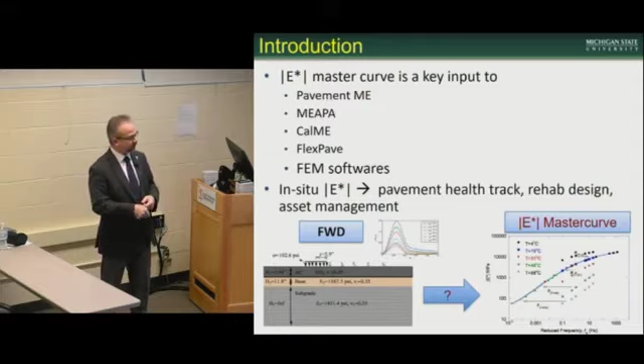So now one of the things is, can we get the in-situ dynamic modulus from the field? That's one of the things that we are interested in. Of course, we can run laboratory tests to get this parameter, but that is the main idea of this particular work. Now, the problem statement was formulated in a way to ask: can the current FWD systems, is there any way that we can use these systems to get the dynamic modulus master curve?

They are not designed to get the dynamic modulus master curve. So originally when they were designed, Dr. Thompson was showing me very early designs of FWD. You have a weight, you drop it, and then measure deflections. I don't think it was designed for the dynamic modulus back then, I assume.

So later on, obviously, it has been improved quite a bit. Now, the chances are, at the time when we were starting this work, it is not sufficient - it's not enough to get the dynamic modulus. So if it is not enough, what is needed to improve the FWD so that we can get the dynamic modulus master curve? Early on, we were entertaining the ideas of, okay, multiple pulses - can we come up with equipment with multiple pulses and get the data properly? And, you know, can we get the dynamic modulus that way?

So this is just early on discussions and all that.

A little bit of a spoiler alert at the very end: if the dynamic modulus, if the FWD data time history is collected properly by the equipment, and if the temperatures are known in the pavement, or at multiple temperatures you run the FWD, you should be able to get the dynamic modulus master curve pretty good with the existing devices. That's the spoiler alert. But I'll tell you how we get to that conclusion.

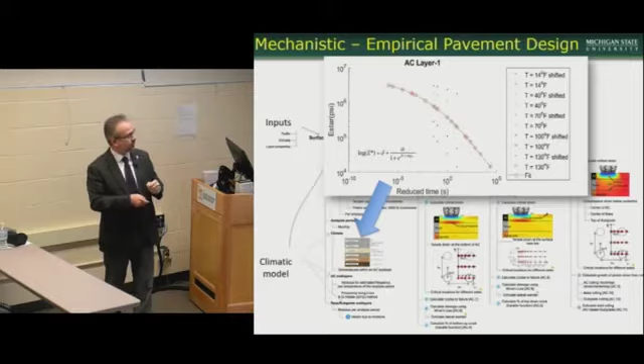So in pavement ME, what I was showing here is just a snapshot of pavement ME, all the different components of pavement ME or MEPDG. Dynamic modulus at different temperatures and different loading speeds are heavily utilized in pavement ME.

And that dynamic modulus, if you look at the NCHRP 1-47 sensitivity study, they have what they call tornado plots. In these tornado plots, they look like a tornado. If you look at the very top, it's sorted so that the highly sensitive parameters are at the top and low sensitive parameters are at the bottom.

The numbers you're seeing here, the first two are the hot mix asphalt alpha parameter, which is essentially this parameter - you probably know this. Dynamic modulus can be represented using a sigmoid function. This alpha parameter and delta parameter are the two most sensitive parameters in MEPDG. So the outputs are very sensitive to these two. It's important to get these two right, even more so than the thickness, as this graph shows.

So we all understand dynamic modulus is important, it's a parameter we want to get. First we need to be convinced of that, obviously, right? Now, how do we get that?

So we develop a bunch of algorithms so that we can simulate the falling weight deflectometer stress and the output strain. One of the things we did is we call them forward algorithms - we developed layered viscoelastic, multi-layered viscoelastic forward algorithms.

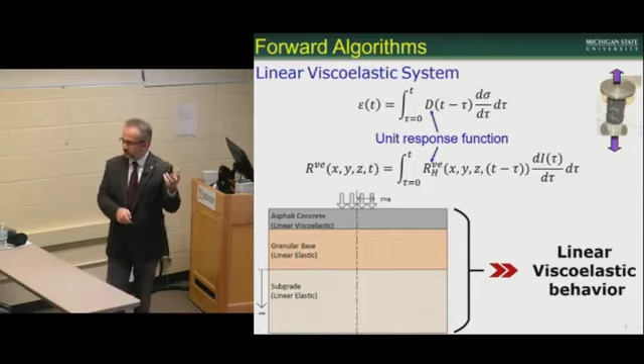What you're seeing here is, if we have the unit response - R is the response, H is for unit, RHVE - this response could be deflections, stresses, strains, anything. If we have the unit response in this system, we can do the convolution to come up with the viscoelastic response. We've shown this is true in FWD through finite element analysis, and you'll see this - it's somewhat similar to a uniaxial system.

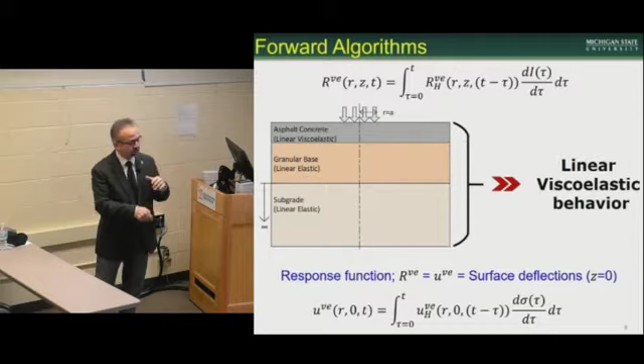Now in this particular problem, FWD deflections are of interest. So the response we're talking about here is U, and U here is the vertical deflections - that's the only one I'll be discussing throughout, not the stresses or strains in this talk. So I'm replacing RVE with UVE, U being the deflections at different locations, and this Z is equal to 0. So we are only interested in surface deflections because we're only looking at the FWD data.

Now, one of the most important key aspects of this overall thing is how to get the unit response deflections, viscoelastic unit deflections. Schapery showed that we can use this convolution to get the viscoelastic deflections or viscoelastic response if we use the unit response due to an elastic analysis evaluated at relaxation modulus at that particular time t.

In other words, instead of running a full-blown viscoelastic unit response, you do a layered elastic analysis using a unit load, but for different times you evaluate the modulus at different times. When you do that, what we call unit response master curves are generated. So for the very first step in this whole analysis, we generate the unit response master curves.

So these are essentially just like D of t. Think of this as a creep compliance master curve, of course with a very different shape. It's like a unit response master curve.

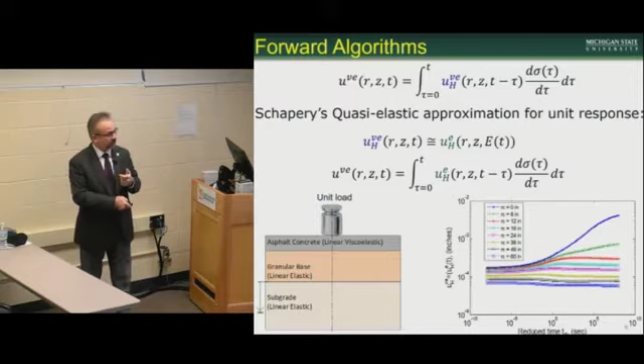This blue line is the deflection right at the middle sensor. The green line is deflection at 8 inches from the center. As you can see, with reduced time, the sensitivity to the reduced time decreases as we get away from the center load, which is very logical. So these are your unit responses, and we plug them in here to come up with the viscoelastic response.

Now, how about the effect of temperature? That's obviously very important, and so far I haven't talked about it. We know that asphalt mixtures obey the time-temperature superposition principle, so we can use the shift factors to account for temperature with depth.

What this is showing is a typical simulation of temperature. This is coming from the MEAPA software, but it's essentially the same model developed by Dr. Barry Dempsey right here in this institution. It's literally his thesis implemented in this code, the EICM code, the same thing. You can see the temperatures vary very widely.

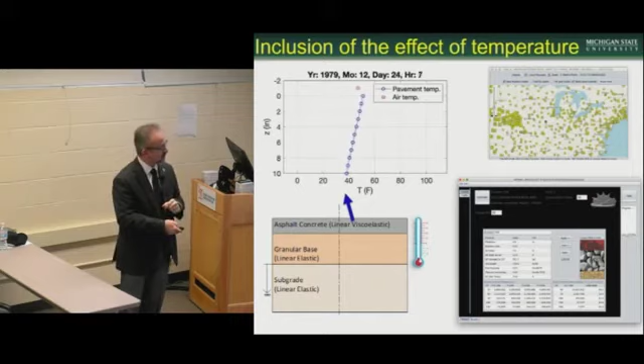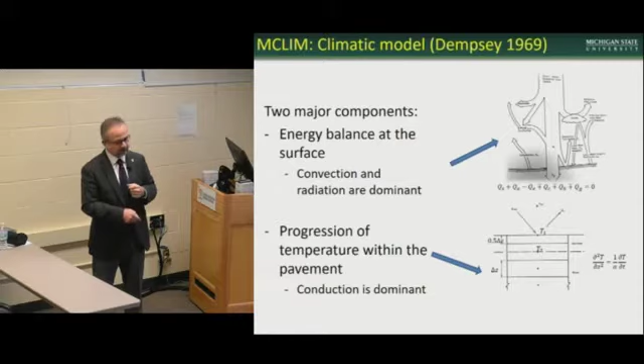So this is a good thing for us. If you are interested in getting the dynamic modulus master curve, fluctuation of temperature is very good because you want to get that information. If you have that information, you can get the shift factor coefficients also, not just the dynamic modulus. This slide shows how we got that temperature versus depth, again based on Barry Dempsey's model from his 1969 thesis.

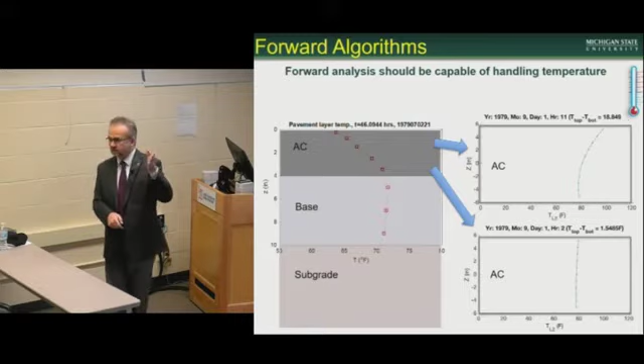Anyway, bottom line is we would like to be able to exploit this information. Sometimes asphalt concrete has a temperature variation, like this daytime temperature kind of thing, and sometimes at certain times of the day it's pretty much constant. So we need to know all this.

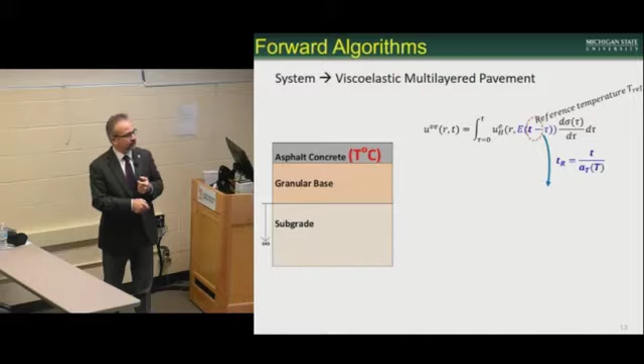Now, if the pavement temperature is constant, things are easier. So instead of time, we use the reduced time, essentially time divided by the shift factor coefficients. Instead of the modulus at a certain time, we use the modulus at reduced time to perform the same convolution.

So to recap, a little more step-by-step description on how we do all this. Certain things I'll be repeating a couple of times on purpose, hopefully to convey what I'm trying to say a little bit better.

Step one is obviously coming up with the structure and what kind of structure that you have. Step two is coming up with a trial or input relaxation modulus master curve. If you know the dynamic modulus master curve, you can calculate mathematically the relaxation modulus master curve, through Prony series or some other methods. So in the forward algorithm, we have the dynamic modulus master curve, and we calculate the relaxation modulus master curve at the reference temperature of 19 degrees Celsius, for example, in this particular case.

Now what we do is for a given time and for a given temperature, we look at the modulus that corresponds to this particular time, and then we plug that modulus into the layered elastic analysis, and we come up with a unit response master curve. This particular point is just this point, and we repeat this for all different times throughout the relaxation modulus master curve. All these little dots result in this one, and once this is done, this is your unit response master curve.

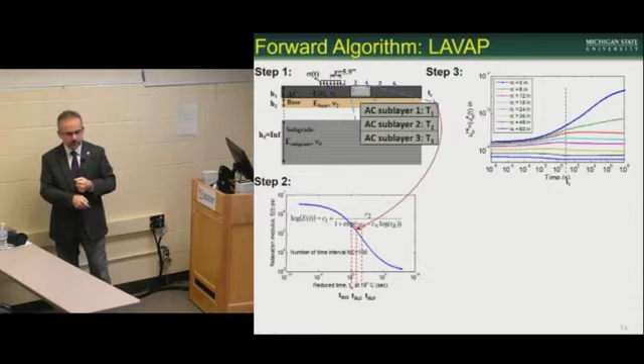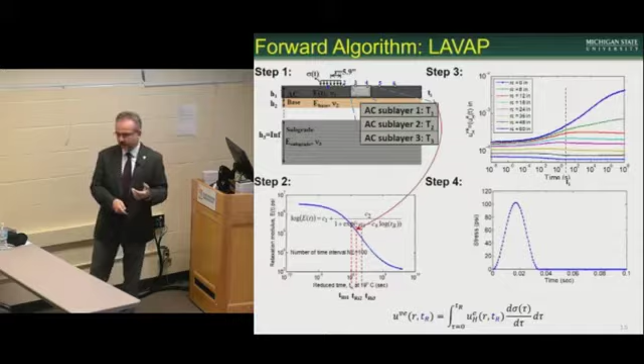When we have a temperature profile, things are almost exactly the same, except for different temperatures. We sublayer this AC layer into multiple sublayers as fine as you want, depending on how accurate you want to be. For each sublayer, you have different temperatures, and you go to the relaxation modulus master curve, find your reduced time, and place the modulus based on the reduced time.

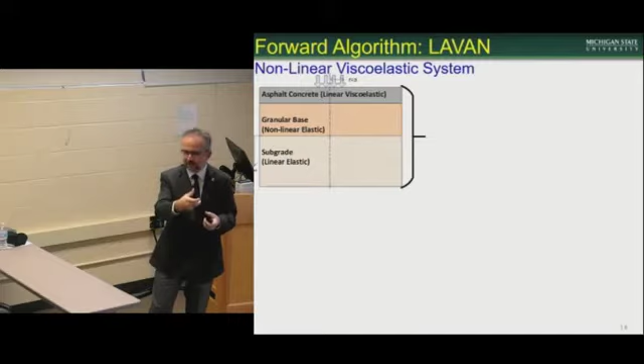So if you have stress changing in the radial direction, and you're going to have stress states changing in the radial direction, that's going to influence the modulus in the radial direction. So the obvious, accurate answer is no. You can't do that.

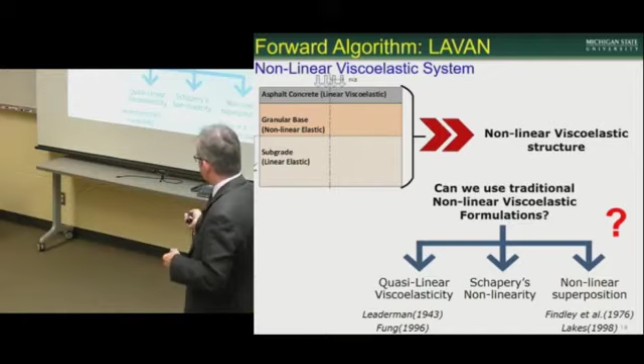So there are traditional nonlinear viscoelastic solutions like quasi-linear viscoelasticity. There's Schapery nonlinearity. These are some of the methods I'll be working on. We tried all of these, and that's what I will be talking about a little bit.

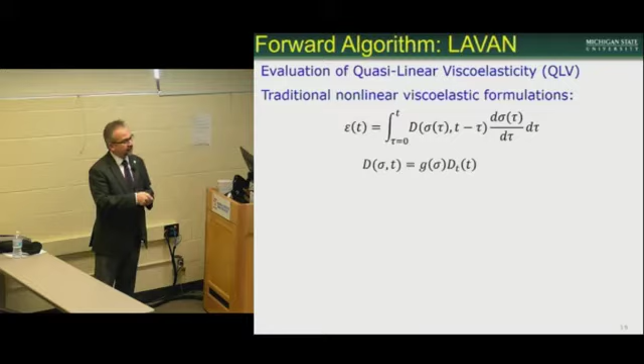Let's talk about the trial of quasi-linear viscoelasticity. Now in the quasi-linear viscoelasticity, you have D of t, now not just a function of time or temperature, but also a function of the stress. This is for a uniaxial case. We started from a uniaxial case, to see if we can move to a multi-layered elastic analysis.

Now, in the quasi-linear viscoelasticity, usually the idea is: can we divide this into two components? One of them is only a function of time, independent of stress, and it represents the shape of the creep function - that's D sub t. The second one is G sigma, which is the component that is only a function of the stress, not dependent on time. So that's what quasi-linear viscoelasticity is. Can we divide this into this? That was our trial, and if we can, then we can separate these two.

And then, if indeed this is independent of time, this can go outside the convolution, so things become a bit easy.

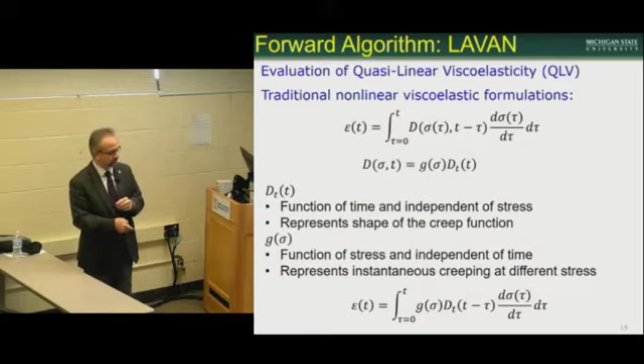Now, when we try to do this, first thing we wanted to look at is whether this is true or not - whether this G sigma is independent of time. So if this is G sigma, I'm rewriting the equation in terms of unit response deflections, instead of d of t, writing u e h t. For this to work, this divided by this should be constant, independent of time. That means for different stress states, all these need to collapse on a single curve.

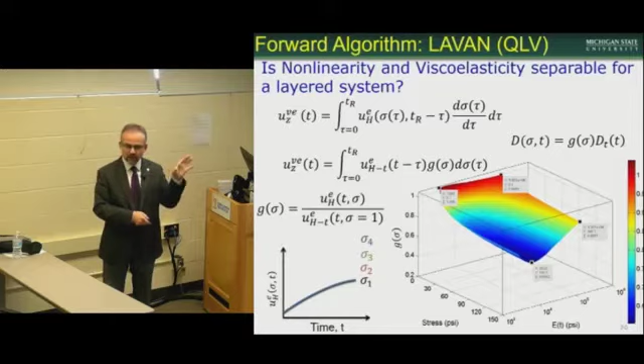When we did this, we did a lot of calculations of viscoelastic deflections and many different unit responses - these are all forward analyses we have done. The answer was no. There is no such thing as G sigma in a multi-layered condition. So this complicates things - this quasi-linear viscoelasticity did not work essentially.

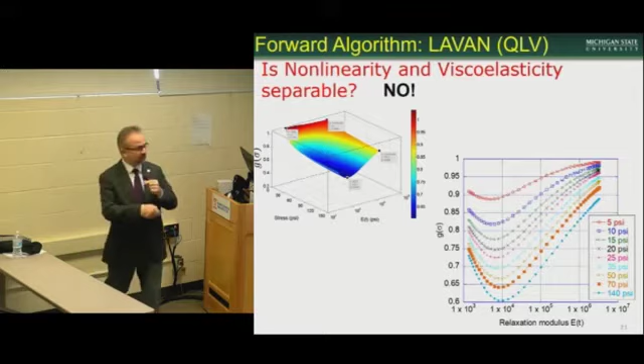This is a slightly different way of showing the same data. Some like surfaces, some like graphs like these. So this is the same kind of data - G sigma as a function of relaxation modulus at different stress states. If G sigma were to be a unique number, it should be a single constant number. Okay, so it didn't work.

Now, then how do we do this? Should we give up or find a different way? So what we did is decide, okay, can we use this entire curve like a lookup table? We generate this matrix of different sigmas and different times or different moduli values - what are these unit response functions. So now the unit response function is not a single line, it's a surface.

Depending on the stress, it changes. So the convolution can still be done by essentially traveling over the surface. Instead of traveling along the line, you are traveling on the surface to calculate the deflection time.

So in order to validate this, things were a little bit more difficult. We had to come up with a UMAT - not me, my student Sudhir. He wrote a UMAT algorithm in Abaqus to implement the nonlinearity of the base in Abaqus, and we compared Abaqus results versus this approach to see if it works or not. And we tried different mixtures.

So asphalt layer is linear viscoelastic. When I say nonlinear viscoelastic, let me make it clear again: asphalt layer is assumed linear viscoelastic, base layer is assumed nonlinear elastic. So the combination is why I'm saying nonlinear viscoelastic.

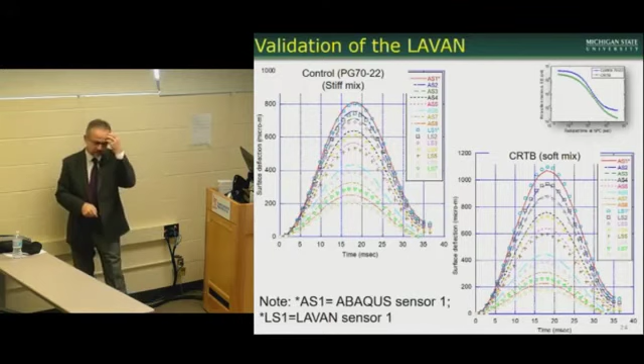Deflections match reasonably well closer to the sensor, and as it goes further, sensors deflections start to deviate from each other. So the bottom line is, if we can use the sensors closer to the load center, we should be able to back calculate nonlinear properties with reasonable accuracy.

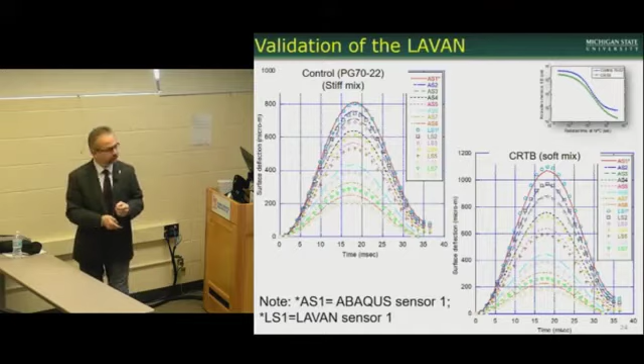Now, back calculation approach - the back calculation is essentially nothing but running the forward analysis, either LaVa or LaVaN or LaVaP, whatever algorithm is used, many times, varying inputs. Obviously, that's what back calculation is all about.

And one thing I want to say is this duration is extremely important. This is a typical FWD duration, 35 milliseconds, very, very short. So let's say going from here to here, this is your time history end. Whatever this duration is, if you take the reduced time and look at the E of t curve, this is the portion you are using in your forward analysis. So up until this point, you're using this to calculate the deflection time histories of the entire thing.

That means that this portion is not utilized during the forward analysis. If you're after calculating this side also, if you're not using the forward, you can't possibly get it. So that means that one of the biggest issues with FWD is the duration of the pulse.

It's very short, so the duration of the pulse needs to be longer, or the temperatures should be a little bit higher, so that we can use as much of the curve as possible. That's one of the key recommendations to the FWD manufacturers - the pulse duration should be a bit longer. Another big piece of advice is really getting the deflection time history very well, which is many times the problem, which I'll get to later.

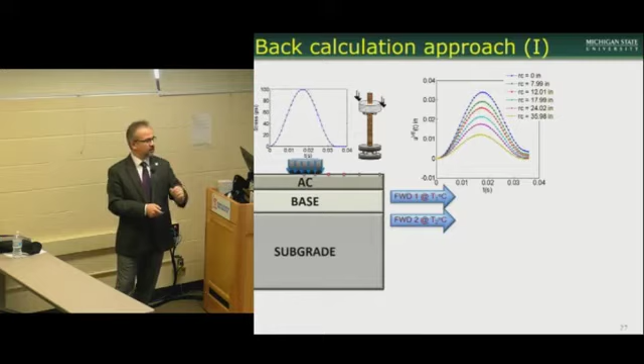Now, when we do the back calculation, we can either run the FWD if you know the temperature to be relatively constant - let's say you are somewhere around 4 a.m. in the morning, where the temperature comes to that level - or you can run at multiple temperatures. If you run the FWD at multiple temperatures and get the deflection time histories at different temperatures, you can get a bunch of E of t curves, and you can shift them, and come up with both shift factor coefficients and the dynamic modulus master curve.

Now, do you understand why the lava was chosen? Okay, back calculation - so, lava.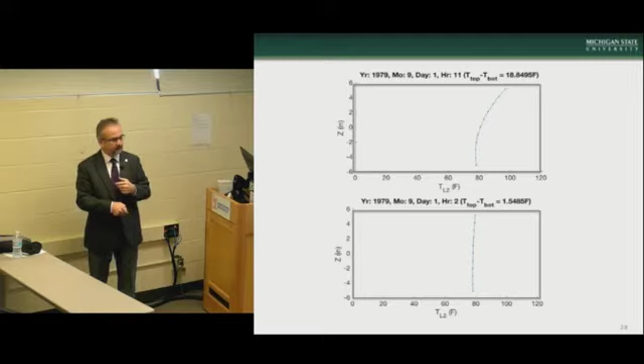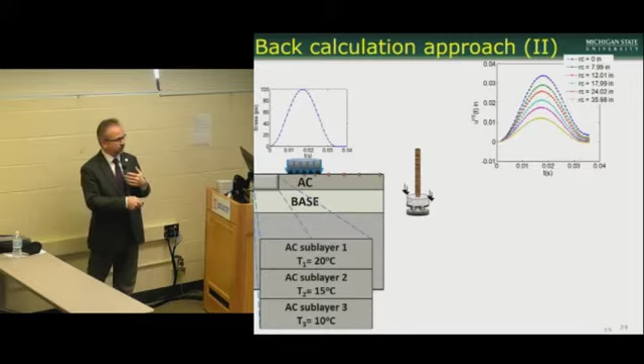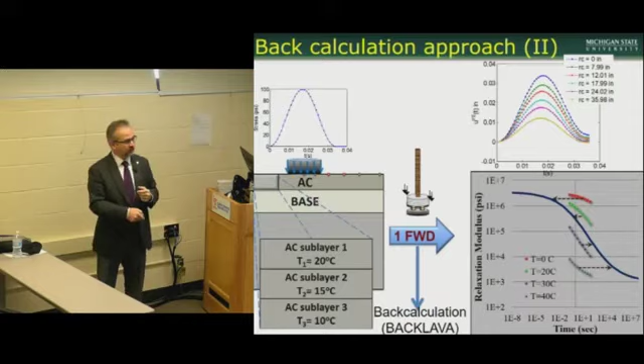So again, these are another example - this is a typical constant temperature profile that could be used. If you have this kind of temperature, things are harder - you need to run the test at multiple temperatures. Now, if you have a good temperature profile, meaning a pretty large difference throughout the depth, that's wonderful. That way you can just run a single FWD if you know the temperature profile, and you should be able to get the master curve reasonably well.

So these are the algorithms that we have - LAVA forward algorithms and back-calculation algorithms. That is the picture of a good back-calculation.

Okay, so now the whole issue is an optimization problem. From now on, I'll switch gears a little bit. Up until now, I've been discussing what is mathematically possible - can we do a forward algorithm? So now what I'd like to come to is the back-calculation algorithm.

That is a very challenging problem. You can have the best forward algorithm, but if your back-calculation algorithm is not working very well, it will go to local minima, which will give you weird results, like subgrade modulus being larger than the base modulus, which we see all the time in many back-calculation algorithms. So you have to be careful.

Now, if you're assuming the base to be a linear elastic material, we will need 6 unknowns for the AC layer - 4 of them are the sigmoid coefficients, and 2 are the shift factor coefficients, since we want to get the dynamic modulus master curve. So we have 6 unknowns, 1 unknown for the base, and 1 unknown for subgrade - so the number of unknowns is 8 for a 3-layer structure. Obviously, if you have a 4-layer or 5-layer structure, or multiple AC layers, things can get exponentially complicated.

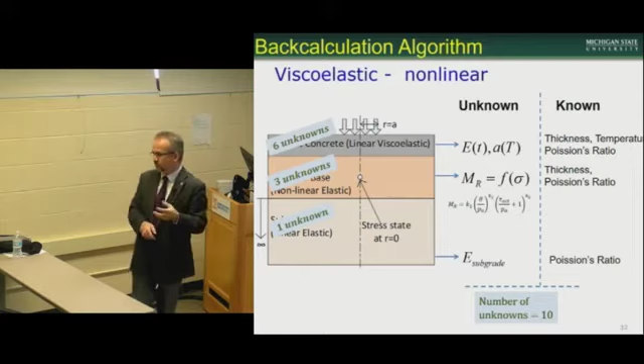So there are many out there. One of them, obviously you're all aware of, is the Excel Solver - you can do Excel Solver. That's a very simple simplex algorithm, one of the simplest ones, but it depends very highly on whatever the input is, and it will go to local minima very quickly. Global minima is usually hard to get. And if you're using MATLAB, fminsearch is another one.

Now what we worked on is something called genetic algorithm. Genetic algorithm is essentially a non-traditional optimization algorithm. I can spend half an hour explaining all this, but I won't do that. Essentially, what genetic algorithm does - it has a fancy name, but it's not that fancy. There's no genes involved.

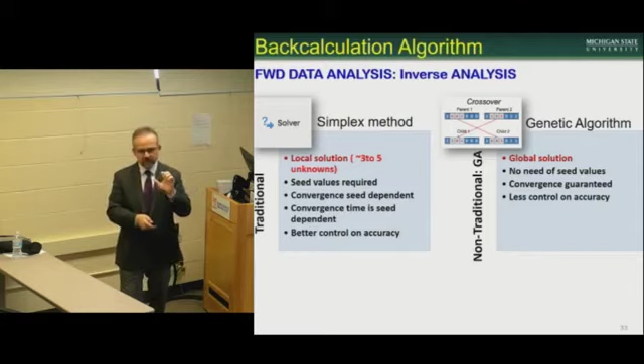It looks like a gene. You have a bunch of inputs. You run the solver, let's say, and then you come to a solution by running it multiple times. So you essentially rerun it again by just changing the inputs. You don't just stop there, you keep changing in a smart way. That's why it's called a genetic algorithm. So you're changing the inputs in a certain way such that the global solution is reached. I'll talk about it a bit more a little bit later.

So the general steps of the back calculation are: you have a temperature profile, and that is assumed to be known. Thickness is assumed to be known. This is a big assumption, so you need a good thickness estimate. We did some sensitivity analysis about what if we don't know the thickness very well, and how much everything is affected if there's an error in thickness. The FHWA report includes all that sensitivity, but this is an important thing that needs to be measured properly. Poisson's ratio, what is the Poisson's ratio? That's also important. There are relationships between modulus and Poisson's ratio that could be used there.

So the unknowns are the sigmoid coefficients, C1, C2, C3, and C4. What are these numbers? I've relabeled them - this is alpha, beta, gamma, and delta parameters that I showed earlier, but we like to use these better than the other ones. So the A of T coefficient, which is the shift factor coefficient, and unbound layer moduli - these are the unknowns.

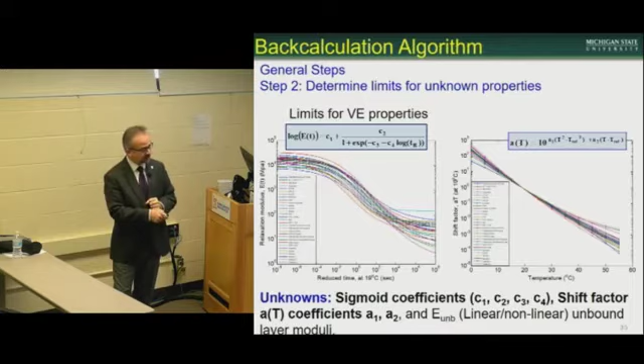Now, in the genetic algorithm, we need to know the limits so that the search has certain bounds. So what we did is we looked at a database of dynamic modulus master curves that we had developed on hundreds of mixes throughout the years. And these dynamic moduli we converted all to E of T curves, relaxation modulus master curves. Then we looked at these C1, C2, C3, and C4, and we tried to come up with different bounds for C1, C2, C3, and C4. We used the same approach here - these are the shift factor coefficients of the dynamic modulus.

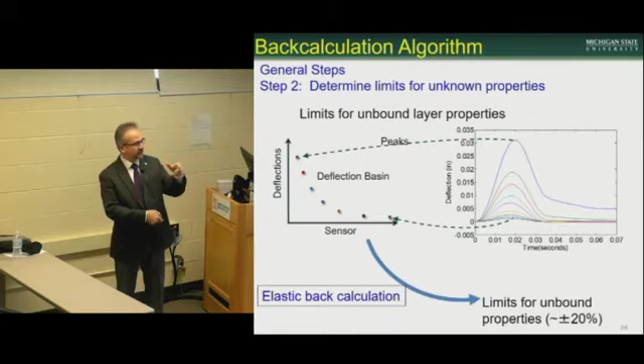Let's move on. For the unbound layer properties, we also need some kind of bound so that our algorithm is fast. So what we did is, for the unbound materials, our idea was let's just use the traditional simple layered elastic back calculation based on deflections. Let's just take that as a seed and go plus minus 20-30% of whatever the elastic value is. So that would be our unbound bound. It's not a wild search, it's just a little bit narrowed search so that the optimization worked a little bit better.

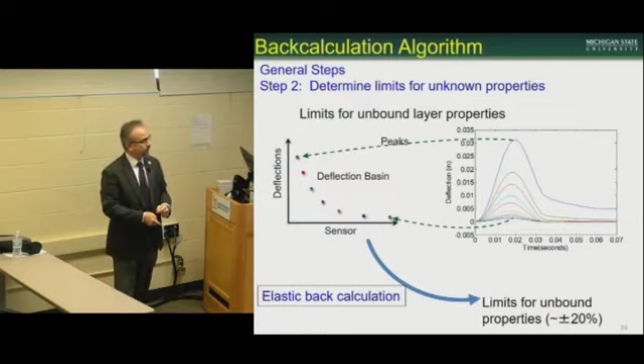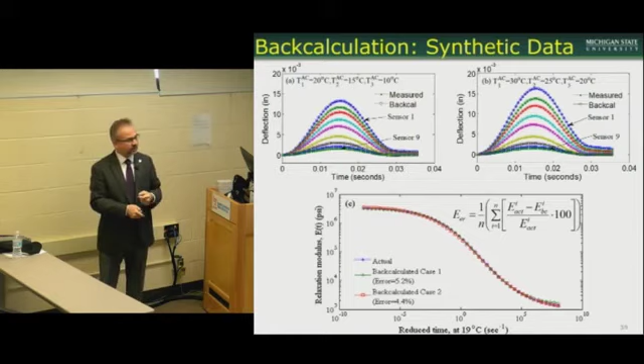Here's another example, a couple of examples using synthetic data. So the first thing we did was - okay, let's see synthetically, if you know exactly what the deflection is going to be by generating FWD synthetic data, let's see if we can get those numbers back. This is a simulation of a multi-layered structure with about 10 degrees Celsius difference from top to bottom. Using synthetic data, we were able to get a perfect match with this genetic algorithm back calculation. This is really just a testing of the algorithm itself - whether if you have perfect FWD data, would it work? So in this case it's really like a self-check, and it was working very well, so the algorithm worked well.

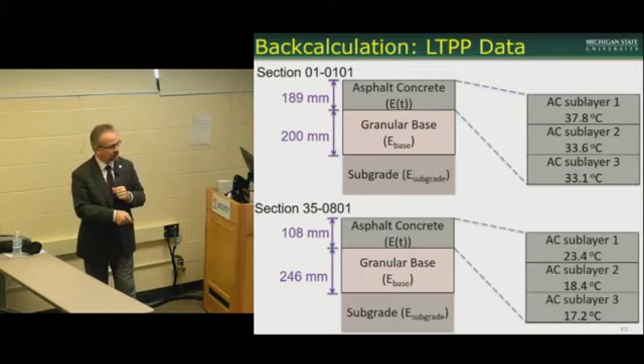So how about real data, obviously, right? For real data, what we did is we looked into LTPP. The good thing about the LTPP database is they have FWD time history, and they also have viscoelastic properties of different sections. So we just needed to find good sections with accurate data. These are some examples I'm going to be providing - this is section 0101, 35, 0801. These are different field sections. From the LTPP database we also had temperature profiles for these sections during when the FWD test was done, so that data was available. When the FWD test was done, this was the temperature profile: top layer was about 38 degrees Celsius, bottom was 33 in this one; and in this other one, top layer was 23, bottom was 17.

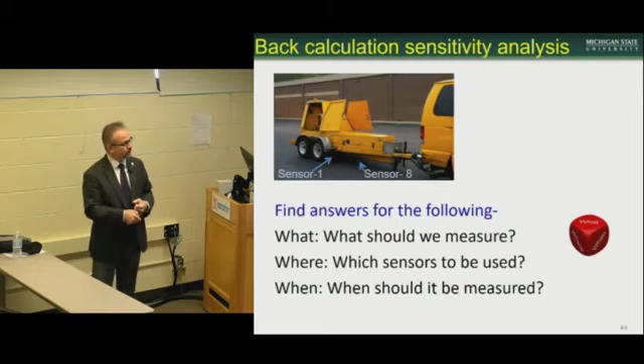So now we also did some sensitivity analyses. One of the questions is, okay, what temperatures to run FWD? What is the best temperature? Which sensors to use? Those are the kinds of things we discussed and looked into.

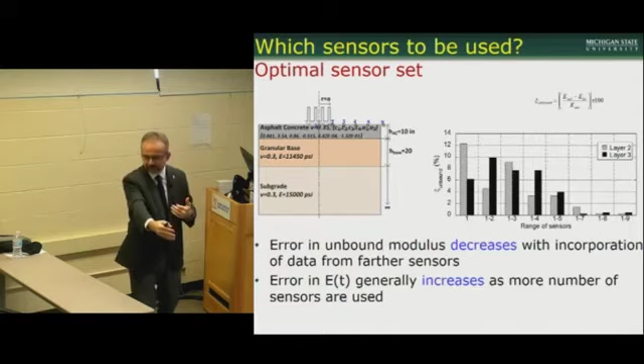What we found is error in unbound modulus decreases when we incorporate more sensors. This is not something surprising. Obviously, if you use further sensors, you can get more information about those lower layers. And error in the dynamic modulus increases as more sensors are used. So it's the opposite. If you are more interested in the dynamic modulus, you need to use closer sensors. If you're more interested in the base and subbase, you need to use all sensors. It all depends on what you want to do.

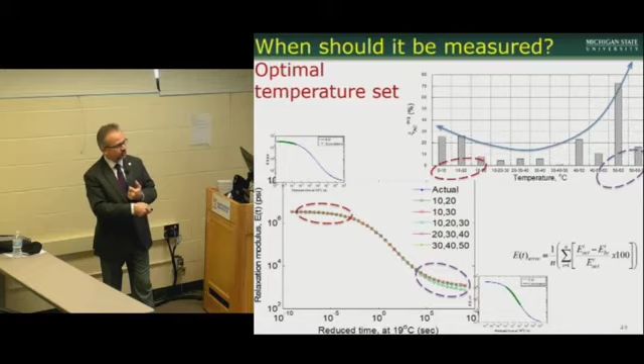So what is the optimal temperature set? We found this through simulations using many different temperatures. If the FWD testing is run anywhere between 10 degrees Celsius up to 50 degrees Celsius, around that region is where you can get the most out of it. At very low and very high temperatures it doesn't work, because at very low temperatures you're only using one side of the curve, and at very high temperatures you're jumping from here to here too much without using the rest properly. So there's a linear jump. That's really the main point.

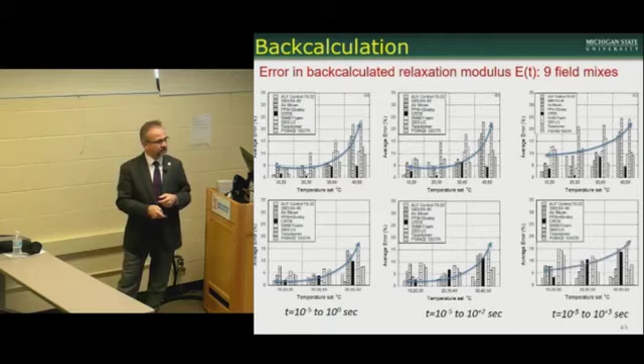We repeated this across many different mixtures and many different dynamic modulus master curves, and they were all consistent. So temperatures around 10 to 20 degrees Celsius are ideal. Essentially, if the FWD test is run in early morning or around noon, that would be the best case.

Now, finally, in order to improve the back calculation algorithm, we came up with a three-stage scheme for calculating all the possible parameters. The first stage is a nonlinear elastic back calculation to come up with the K1, K2, K3 values of the base and subgrade, and the viscoelastic parameters. Then we fix the K1, K2, K3, and vary the viscoelastic dynamic modulus master curve coefficients by fixing the others.

Then, once we find some initial values, instead of using the genetic algorithm, since our seed values are very close to the global solution, we use the simplex algorithm to find the solution by varying all the parameters. This three-stage scheme turned out to be very fast and pretty accurate also.

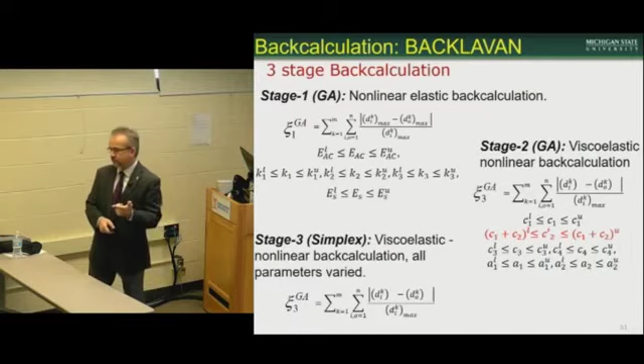So these are some of the results. The percentage error between the dynamic moduli at different temperatures is less than 10% or so, which is pretty good, considering the dynamic modulus test itself has a 30% error when you run the test at high temperatures.

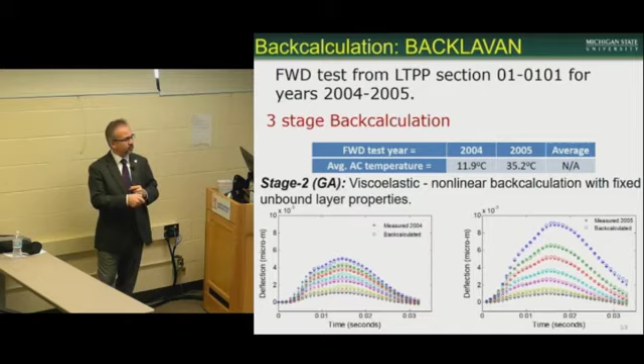These are some other examples using the 3-stage algorithm, some back calculation results. Again, another LTPP nonlinear back calculation results. They have been doing really well.

Finally, one last couple of slides about how do you use this data. Can we use this data on LTPP? What we did is we looked at the evolution of E star with time. Can we correlate the cracking observed in the field versus the evolution of dynamic modulus in the field? So we were able to find some LTPP sections with good cracking data and also FWD data at different years, and we used that data to back calculate.

So we were able to see, initially, obviously the increase is captured, like aging. Aging seemed to be captured at some temperatures, and as the cracking grows, reduction in modulus is somewhat captured. It's not always consistent here. Continuous aging seemed to be, that's what we saw in the data.

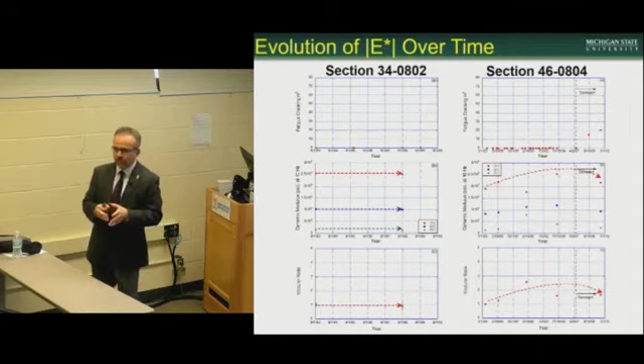Dealing with the field data is sometimes difficult. So what you're seeing here is a section where there was absolutely no cracking that happened, and dynamic modulus didn't change. This is another section where up until here we had the dynamic modulus increasing a little bit and then decreasing after the damage started to appear. So the data is not super clear, but you can kind of see results there.

In conclusion, FWD data can be used to back calculate the proper dynamic modulus master curve. There are two big ifs: if you have the temperature profile properly calculated or measured, and number two, the sensor deflection time history is accurately measured. That second one is one of the biggest issues with the current FWDs that needs to be improved.

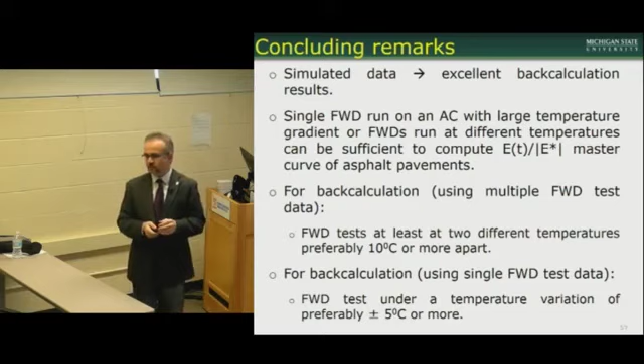Number three, the duration of the pulse needs to be increased. Right now it's a very short pulse, and that pulse is also generating dynamics. When you have bedrock close to the surface, there is wave propagation happening, and because of that wave propagation you have dynamic effects generated. These dynamic effects are not necessarily there when a regular truck passes by. So that dynamic effect needs to be removed somehow from the FWDs. So that's one of the things.

I guess that's all that I'd like to discuss. I already said what the conclusions are. So I think that's all for today. Am I good on time, or 50 minutes? That's about what I planned.

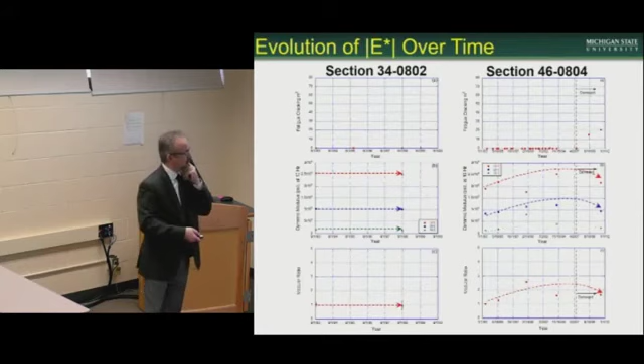Very good, very good. So, see, that aging, first of all, it's there. It's very clear. I mean, when we back calculated dynamic modulus at different times from the data, this increase was pretty clear.

You can see it in several sections, not everywhere. So when you were asking, what if there are multiple sublayers, right? So if the top layer is aging a little more than the others. Exactly. So there is a gradient, not just the aging. So what you will see is, think about one thing, all these...

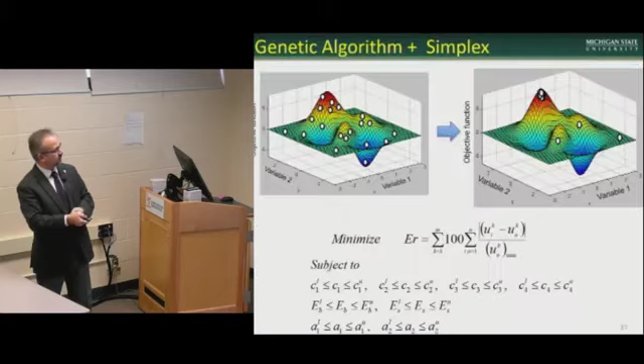Let me go back to this. Let me see. Okay, come on. Hurry up.

Okay, let's talk about this one then. Since the algorithm's sublayer, so the input is how many sublayers you want. Let's say you have a 6-inch layer, you're sublayering into 2-inch or 3-inch layers. When you back calculate, you're going to get 6 dynamic modulus coefficients for the top layer, 6 for the middle layer, 6 for the bottom layer. So you're going to get a lot of layers, and you'll be getting a dynamic modulus master curve for each layer separately. So that's another use.

So if you get really good data, say—assuming again this is a big assumption, assuming you have good FWD data, the test is run properly, deflection time histories are good, and your temperature profile is known—then this shows that you can get dynamic modulus at different layers non-destructively, which is a very powerful thing to do. You can study aging in this way, or air void effects and other things.

What if, within the layer, there is an aging gradient? Then in that case it will be averaged, right? It will be averaged. Yes, from the layer it will be averaged.

So can we further sub-layer the layers, like, everything divided? Yeah, you can sub-layer as many layers as you want. So, the problem is this...

Optimization algorithms—remember 10 unknowns, right? So if you sub-layer into 3, the 10 unknowns become 20-something unknowns. So the genetic algorithm will take a lot more time to back calculate. For research purposes, which is perfectly fine, you can just let it run overnight and come back to the results. You can sub-layer as many as you want, but for practical people, usually that's not acceptable. But theoretically, yeah, you can sub-layer.

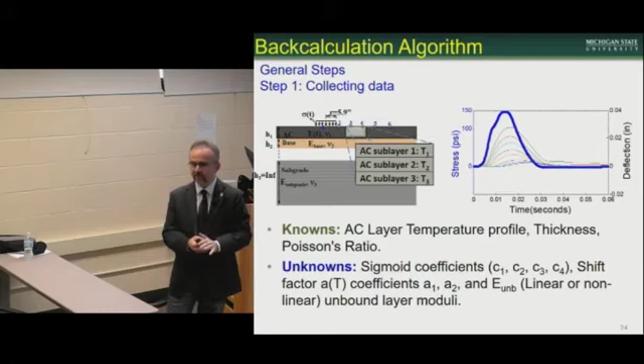I want to give a quick note—I haven't tried it, haven't tried 10 different sub-layers to see if it can back calculate. The algorithms are all available for you to research all that, so you can do it if you want.

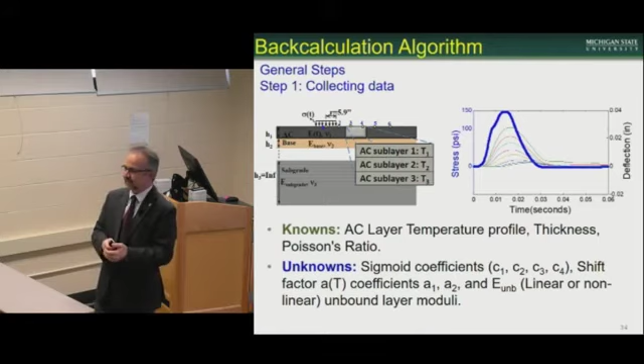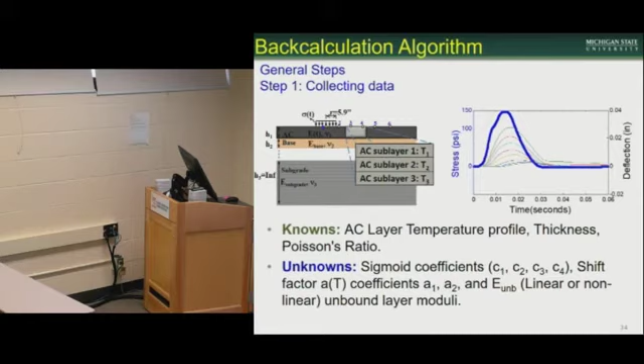Did you consider the relationship between the frequency when you run a dynamic modulus test in the lab and the pulse when you are applying the FWD? Because when you run the complex modulus test, you are applying a frequency, which is a function of the loading. When you apply the FWD, it's just a pulse, which is an impact load. So the frequency you're getting for both are different—is that something you looked at?

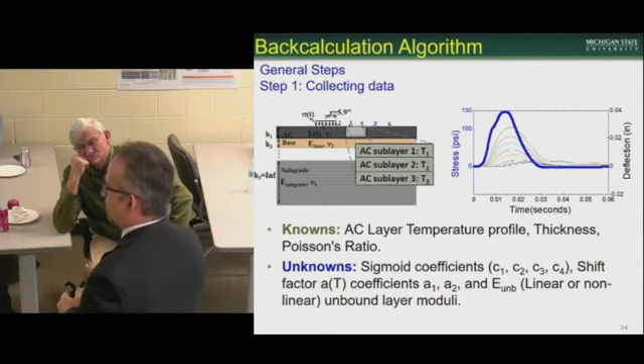It is included, because we don't use dynamic modulus directly—we use the relaxation modulus. So we convert the dynamic modulus to relaxation modulus, moving from frequency space to time space. So the pulse duration—we never use frequency. We use the entire time history and convolution. Therefore we never use frequency, only the time domain.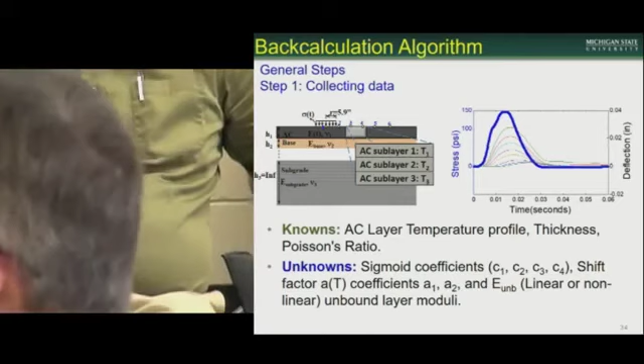I'm getting back to the point because you said that we need to increase the time for the FWD. The more time you include, the more frequencies, in a sense, you're including in the dynamic modulus. Because the time, it's not like 1 over t or 1 over f. None of those apply here. So the more time you have, let's see.

It doesn't apply here, but it does apply to the modulus that you're measuring in the lab. So here, this is the relaxation modulus master curve. Once you have this curve, you can calculate directly, mathematically, dynamic modulus at different frequencies at different temperatures. So all you're trying to do is the larger the portion that you can calculate, the larger the portion of the dynamic modulus frequency space that you can calculate.

The main problem is how do you characterize this into frequency space? What is the frequency? What is the dominant frequency? There's no dominant frequency. If you take the Fourier transform, it comes back to your question—you'll see multiple peaks.

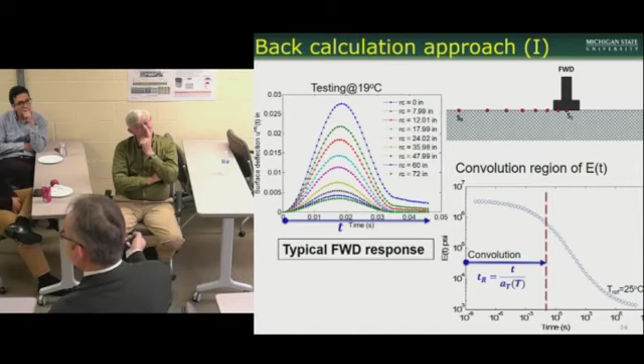Because it's at the surface, the sensor itself is indirectly related to depth, but not directly. So it's not duration—the durations are roughly the same. Even if you do a dynamic solution, the durations are not going to change. It's not like the pulse duration changes significantly with depth. At the surface, usually they don't change.

And this will be a top— that's a discussion. Okay, yeah, he's next. In a, say, a full depth section.

AC over some 12 inches of hot mix on a subgrade. If you use most—all of the deflection accumulates in the subgrade, a lot of it, probably over half of it. If you assume it's non-stress dependent, linear elastic, how does that impact your approach? In that particular case, I don't think it's a wise idea to assume linear elastic for subgrade, because you have a full depth pavement.

You should be using the nonlinearity, which is stress dependent. What I would do in that case is sublayer the subgrade into multiple smaller layers, each with a different modulus, so we can back out the different modulus for each sublayer. So that's how it would work—for most of your examples, you assume a constant subgrade modulus.

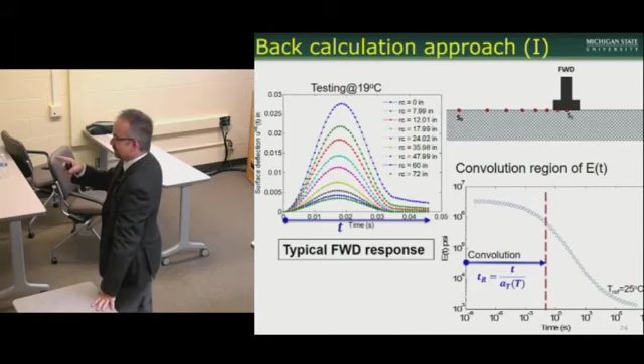Yes, I have a question. Sorry about... I skipped you, but go ahead, he raised his hand last. My question, first, thank you very much.

It's a nice presentation. A question about that sublayering you mentioned. So classical linear elastic calculation usually says when the AC layer is 2 inch or less, it's very difficult to separate them, or it has to be more than 2 inch to see the difference between the sublayers. Do you think here also it would affect the linear elastic algorithm itself? For example, if our sublayer is 1 inch or 1.5, less than 2 inch, do you think in this case, is there any concern, like we should stick within 2 inch, 3 inch sublayers in the AC layer?

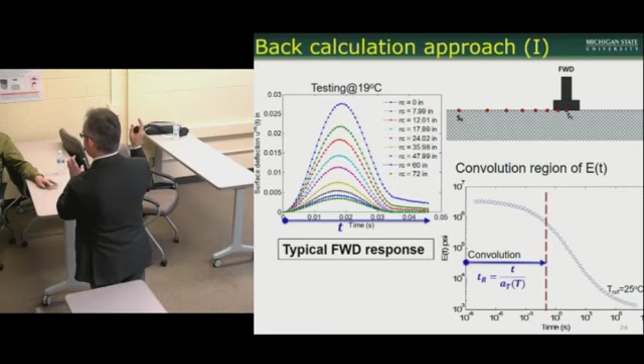No, but the back result we get from the back calculation, we cannot see much difference. The algorithm that we have, if you have a half an inch, the forward algorithm works just fine. No problem, it has been working pretty well. So the back calculation is all about optimization, it's not the layer elastic. If the forward works, the back calculation is the genetic algorithm or simplex. So your question is more related to really whether the simplex or genetic algorithm will be able to capture that level of detail. I don't know the answer, I haven't tried, but I can tell you that the forward algorithm works very well with at least 15-20 layers, half an inch, some layers, no problem. So the forward is really powerful, that is a key too.

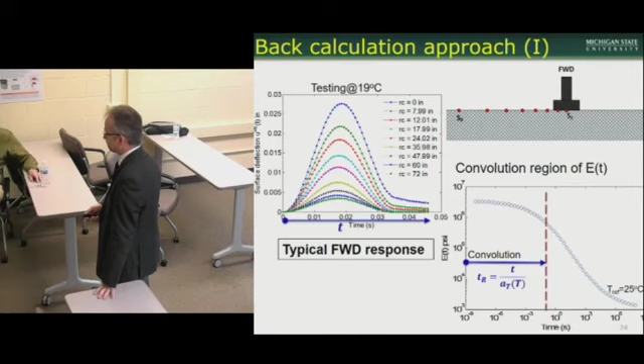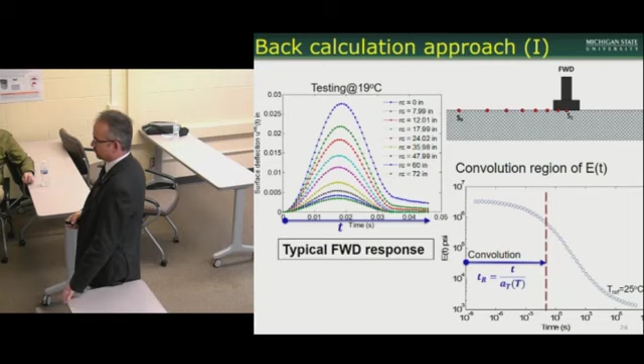Just one last question, it's a very nice presentation. So I have one question. You mentioned you need to increase the pulse duration so that it uses more of the unit response. But I think even if the pulse is zero duration, it's still using the full spectrum of that response, because if you look at the convolution equation, it still uses spectrum.

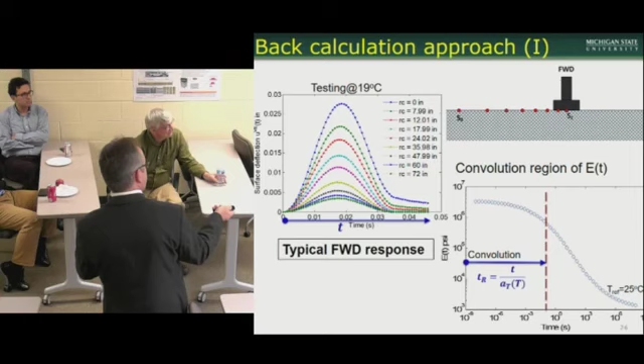So if you look at this, the convolution equation is from 0 to t. So if your pulse duration is like 0, you're using from 0 to 0, not using the whole. We can consider it as zero outside of that. So yeah, let's not say 0, then let's say your pulse duration is 0.01 time, that's up until you don't have any more data. So duration is from 0 to 0.01, so in order for the convolution, you have to start from 0 and you only go up until 0.01. We're not using anything else.

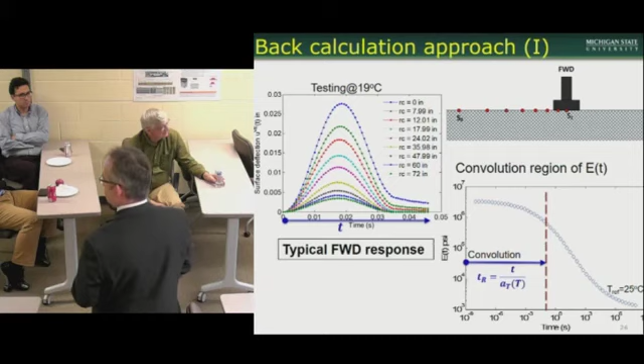Yeah, but you can consider other places to be zero bounded, like outside of 0 to 0.1, like other places are zero. Oh I see, so like pulse and then 0, 0? Yeah, that's fine, as long as you have the deflection in those terms. Oh I see, your very good example. Yeah, so okay, let me back up a little bit.

I don't mean the pulse duration, I mean the deflection history duration. So you can have a short pulse and then 0, 0, 0. That's fine, that's a very good example. You can have 0, 0, 0, 0 there, but then you're going to have deflection, your deflection will be relaxing, it won't be going with 0. As long as you have that, your convolution is going to take care of it.

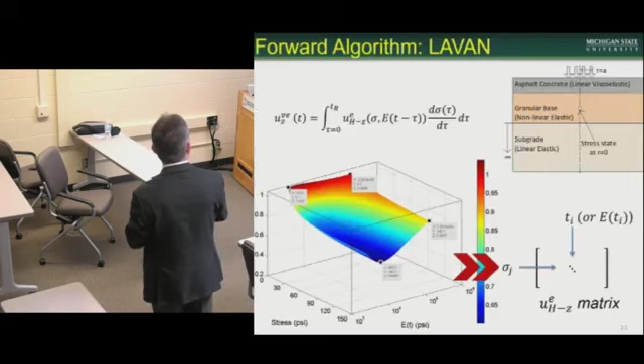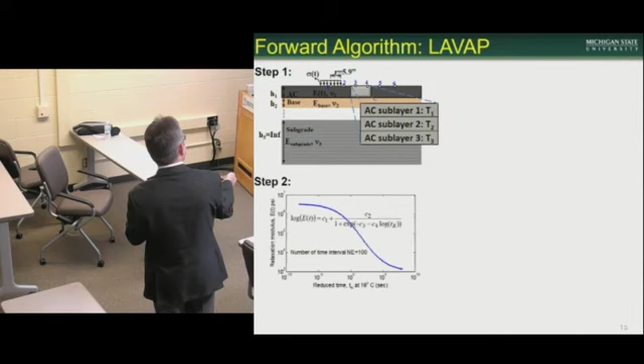Yes, absolutely right. So when I say pulse duration, I really mean - I'm glad you clarified that, that's a very good clarification. It clearly shows you understand. That's good, it's very similar to my study, actually. Oh very good. Yes, so you see, you're absolutely right. This duration is not what I'm talking about, I'm talking about this duration, the whole duration of the time history, the deflection time history.